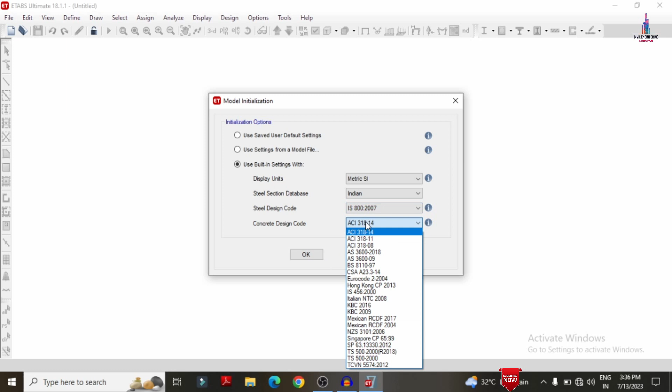Here I am selecting the Indian standard codal provisions, and steel will be IS 800 and concrete will be IS 456 2000. Click on OK. Then we have to enter the grid dimensions data and story dimensions data like this. Here the grid dimension in the x direction is 6 and this is also 6. Here I am selecting 3 here and 3 here.

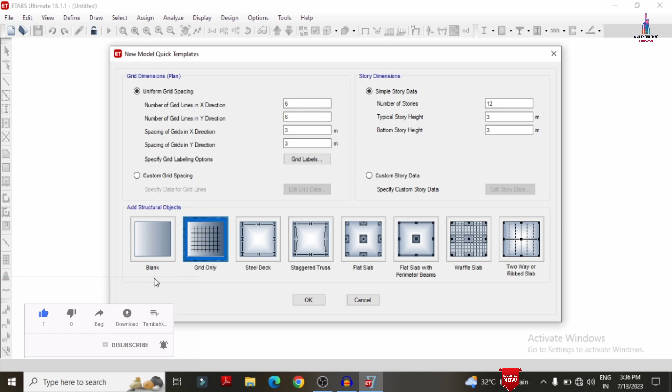Number of stories, here I am selecting 12 stories, and each story height will be 3 meters, as well as the typical story height also 3 meters. After entering all the data related to the grid dimensions and story dimensions, we need to select the grid only option. Why? Because we are creating a new model, so we need to select grid only instead of blank, steel deck, flat slab, etc. Click on OK.

The skeleton model will open here, consisting of the 12 story model. The left hand side window is called the plan view and the right hand side window is called the 3D view. If you want, you can change the right hand side window to plan view and the left hand side window to 3D view. Now you can see this is the skeleton model.

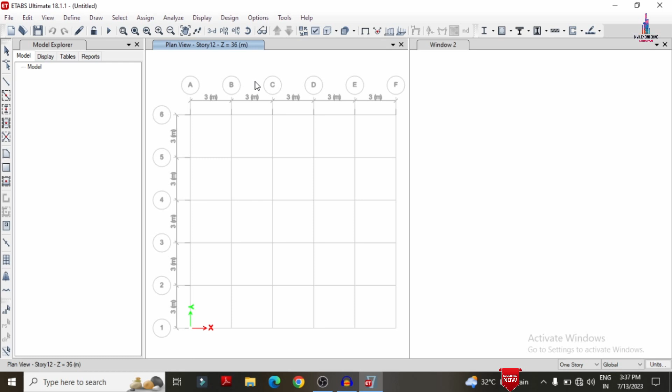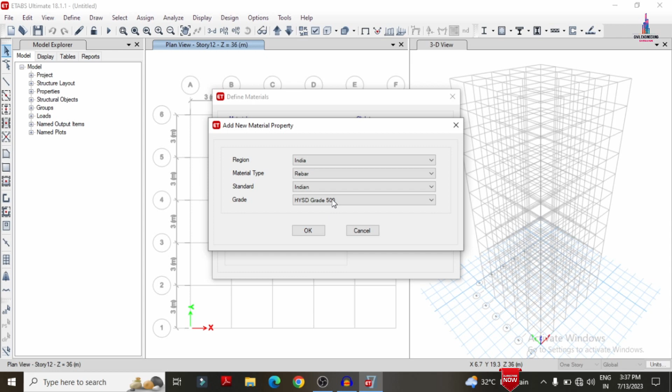After creating the skeleton model, we need to define the grade of the concrete as well as the steel. Click on Define, Material Properties. Here I am adding a new material. I am selecting Indian standard concrete of M30 grade, just assuming here, click on OK. Then, in the same process, we create the steel, not the steel section but the rebar, which is HYSD bars of 500. Just assuming according to my consideration. Click on OK. Again click on OK.

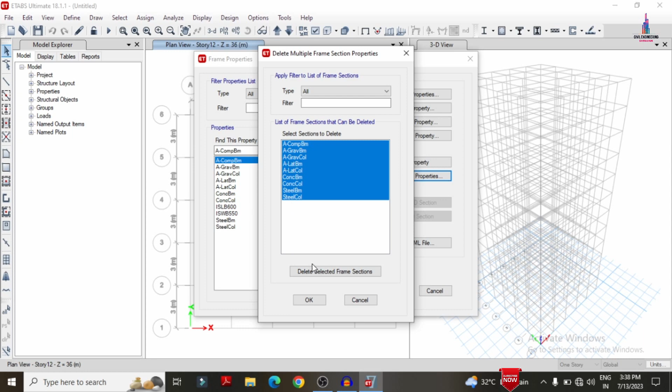After defining the grade of the concrete and steel, we need to define the frame section dimensions like beam, column, slab, and shear wall dimensions. For that, click on Define, select Section Properties, select Frame Sections. Initially we need to delete all previous frame sections. Here I am selecting delete multiple, click on delete frame section. Again selecting one more section, click on delete, click on OK.

Now we have to add sections according to our requirement. Here I am assuming all the dimensions, so you can assume your dimensions according to your consideration. Click on Add New Property. The data will open here like this. You need to select the shape of the cross section of the column or beam.

Initially I am selecting the column which is the rectangular section of 600 by 600, which is nothing but a square section that comes under the shape of rectangular here. So concrete rectangular - I am giving the property name as column 0.6 cross 0.6. Again we have to enter the material, selecting M30 grade concrete, and depth I am taking here as 600 and this is also 600. Click on the reinforcement option and select the column.

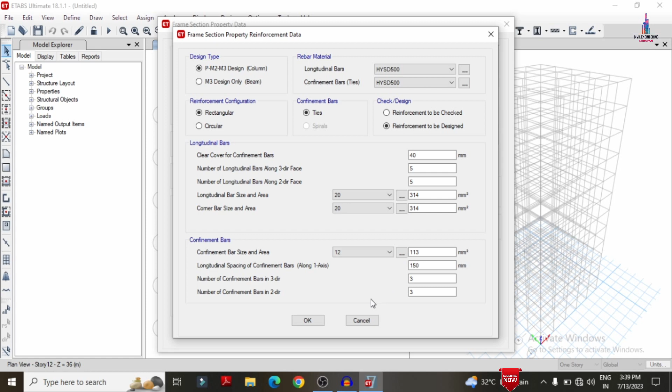I am selecting HYSD bars of 500 here. For the number of bars, I am entering 5, and I am taking the confinement bars as 12 mm. The rest of the data I am keeping constant. Click OK. Click OK.

In the same process we had to delete this property initially, then after that we had to add the beam section property. For that I am selecting add new property, select concrete. In the same process we had to create the beam.

I am selecting the beam which is 0.6 cross 0.45. Select M30 grade and select it as rectangular section. Depth I am taking as 450 mm - sorry, not 450, here 600 we have to consider. Again I am considering the width as 450 mm. Now we can see this is the dimensions of the beam.

Click on the reinforcement value, select it as beam section. Again we have to enter the HYSD bars. We have to take the top and bottom reinforcement as the same. Click OK, again click OK.

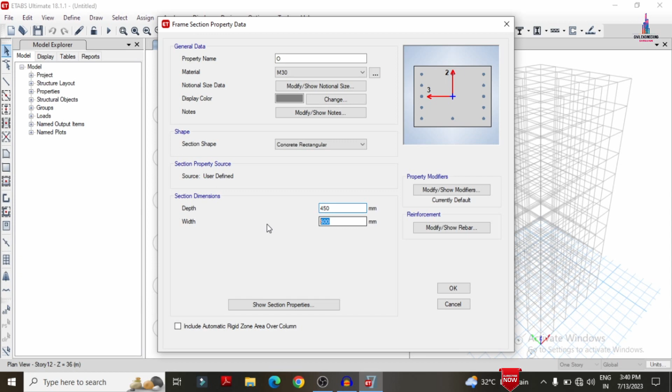Now we have to create one more section which comes under the concrete section, consisting of the outrigger section, which is M30 grade with 450 mm and 450 mm for the outrigger section, which comes under the beam property. I am selecting HYSD bars of 500, and taking 10% of the cover for the particular beam section. I am clicking on OK option.

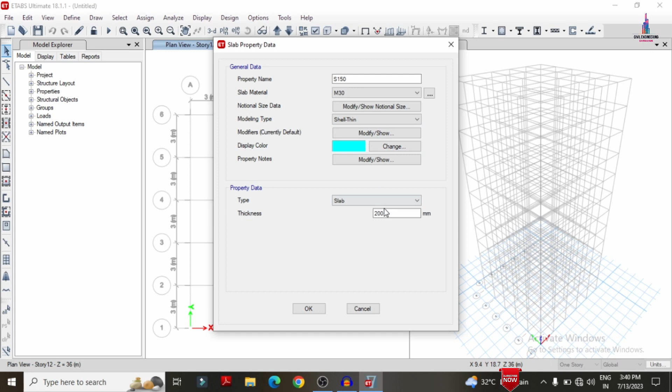After that we have to define the slab section. For that, go to define option, section property, slab section. Initially I am deleting this property, then modifying this property. I am selecting the slab of 150 mm thickness, select the material as M30 grade, giving it as 150 mm, clicking OK option. Then click OK.

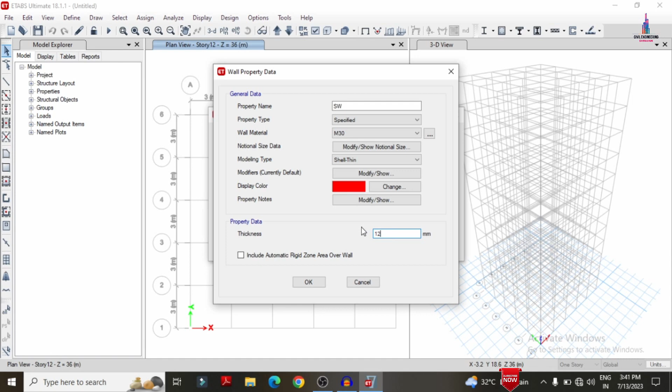After defining all this property, we need to define the shear wall also - the outrigger with the shear wall, just assuming here for the model. Go to define option, select the section property and select wall. Click on add new property, selecting shear wall section which consists of M30 grade concrete, taking it as 120 mm. Click OK option. Select the wall, click delete property, click OK, click OK.

So after defining all the properties like beam, column, slab, outrigger and shear wall section, we have to assign those properties for the building. For that I am selecting all models initially, and selecting the assignment of quick draw beams option here.

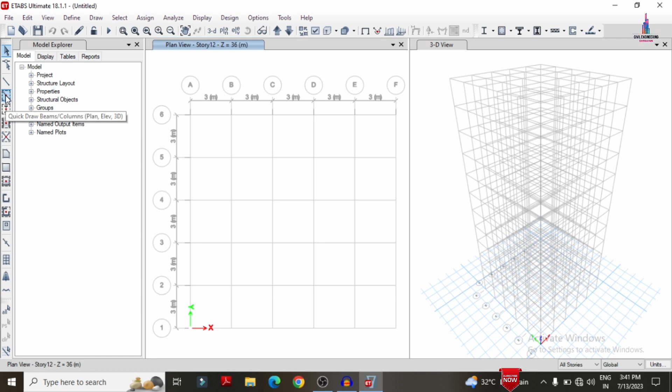Select the property name as beam instead of column on the left hand side. I am dragging to the plan model here so that it will assign all the beam section for all the floors. In the same process I am using the quick draw columns option, dragging here like this so that it will assign all the properties here.

Now we have to assign the slab section. I am selecting quick draw floors option here. Instead of property deck 1, I am selecting slab 150. I am drawing here like this so that it will assign all the properties for the building section.

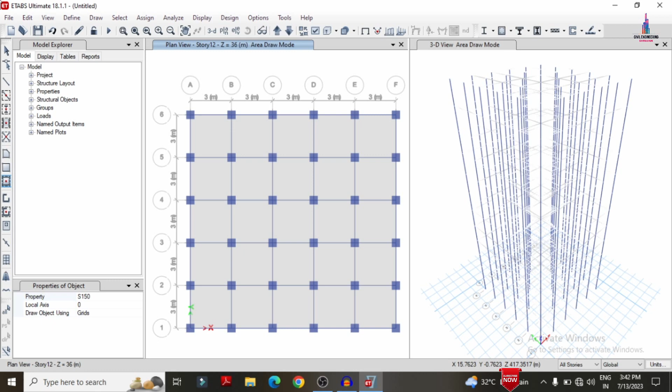Now after this we have to add the shear wall section. For that I am selecting the quick draw walls option, and selecting shear wall. I am assigning it at the center point for all stories here like this. Now you can see it was assigned with one wall.

Again I am assigning one more wall here like this. In the same process I will assign the remaining two walls for the building structure as core shear wall.

After that we have to assign the outriggers for the building. The building structure consists of 12 floors, so for this 12 floor structure I am assuming the outrigger will consist of inner side section inclined beams at the sections of 3, 4 and C, D here. For that I am selecting the elevation section which comes under the C section.

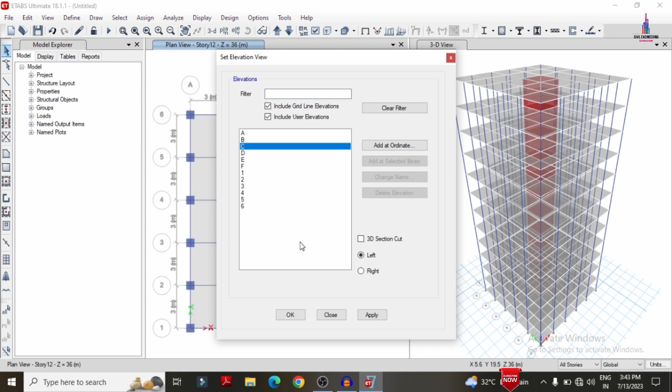Click on OK option, so again we have to draw the beams. I am selecting the add draw beam option. Now we have to change the property name from column to outrigger. I am selecting the fourth story here, and selecting the draw beam option. We have to select the property name as outrigger, selecting fourth story here.

Again in the same process we have to select one more point here like this. In the same process I am adding the outrigger in the left hand side section also, selecting the points here.

In the same process we have to assign one more section. For that I am selecting the draw beams option and selecting the points here like this.

Now in the same process we have to add all the outriggers for the respective 3, 4 and CD sections here according to my consideration.

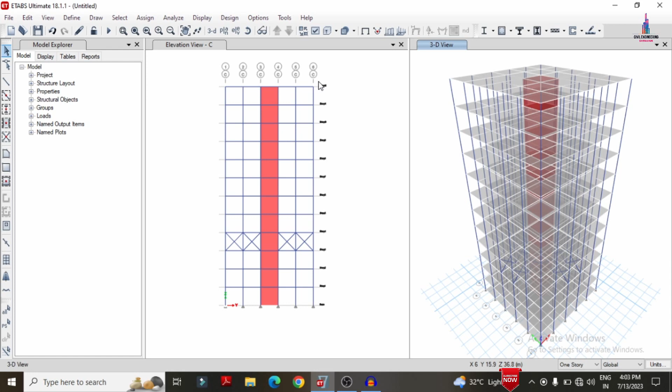Now we have to copy these outriggers to the remaining 8th story as well as the 12th story. For that initially we have to click on the plan view option, selecting the 4th story here, click apply, then click OK.

Now we have to select the outrigger. Go to select option, properties, frame section which comes under the outriggers. Select here so that it will select all the outriggers at the 4th story.

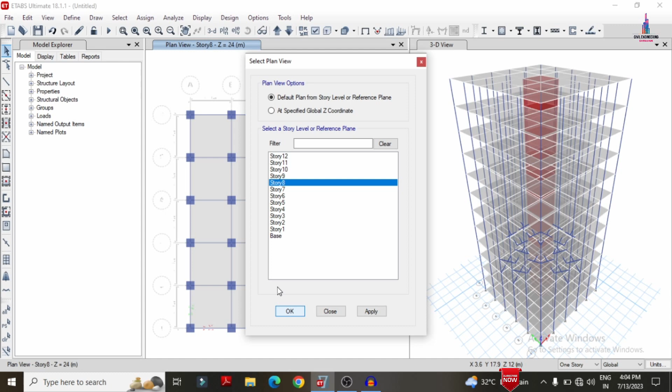In the same process we have to click on the plan view, selecting 8th story here, click on apply option so that it will select the 8th story. Now we have to copy these outriggers to the remaining stories, like 8th and 12th story. For that click on edit option, copy option, again click on edit option, paste option. Selecting OK option here so that it will copy your outrigger to the remaining 8th story.

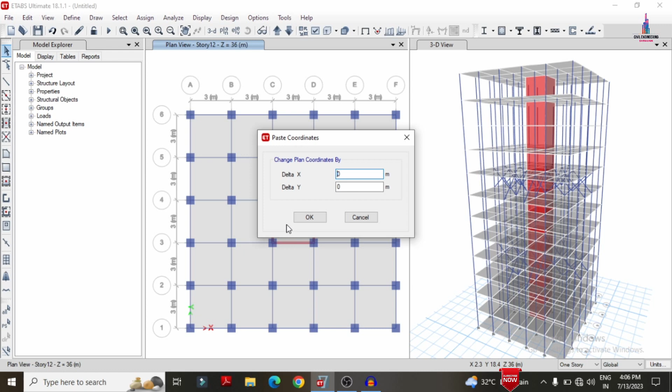Now you can see the outriggers are copied at the 8th story. In the same process I am selecting the 12th story here, click apply, click OK so that it will select the 12th story. Now in the same process we have to copy outriggers, selecting Control V option so that it will ask you to select the outrigger. Click OK so that it will copy your outriggers to the 12th story. Now we can see these are the outriggers.

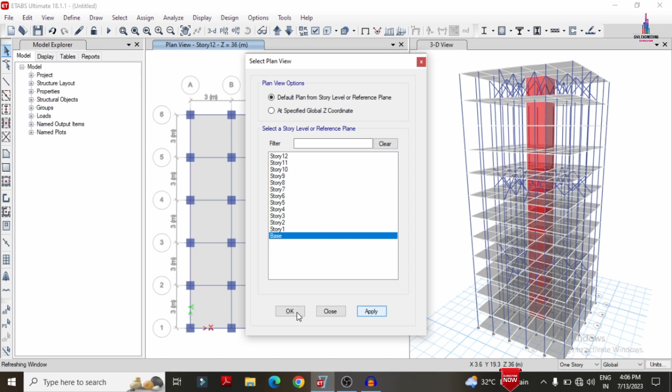After assigning all the outriggers, we need to delete the slabs at the ground story. Select the plan level, select the base, click apply, click OK so that it will select the plan view. Firstly we have to drag all this section by selection option, then click on delete option so that it will delete all the slab sections at the ground.

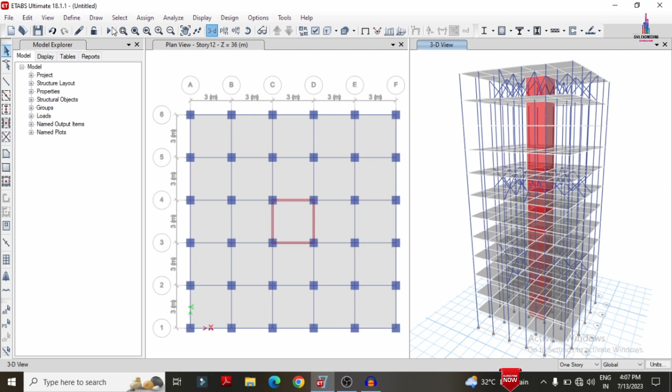After deleting is done, we have to give the load cases for the building structure. For that firstly click on the define option on the top, then select the load patterns option. It will consist of two loads here, related to dead load and live load. Initially we need to add this earthquake load.

Next I am selecting the seismic loading condition according to Indian Standard System 2016. In the same process we have to add the seismic load in the y direction condition. Then I am selecting wind load in the x direction, wind load which comes under the IS Codal provision of 2015, IS Codal provision of 875.

Click on add. In the same process we have to add the wind load in y direction condition. Click on add. Now we have to modify the load cases according to our consideration.

I am selecting the wind load and earthquake load in x direction. Click on modify option. Select the direction which comes under the x direction, and select the per code value according to my consideration. I am taking 0.36 which comes under zone 5 condition. Click OK.

In the same process I am selecting earthquake load in y direction. Here I am selecting the direction of y direction condition system. Click OK. Select the seismic load in x.

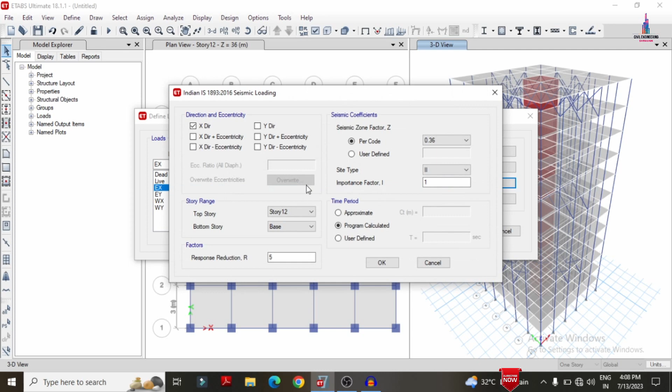We have to click and select the properties according to our consideration. I am selecting wind load in x direction. Click on modify lateral load.

I am selecting wind load of 44 meter per second which comes under terrain category 4. Here we have to change the wind direction angle to 0 and 180. Click OK, again click OK.

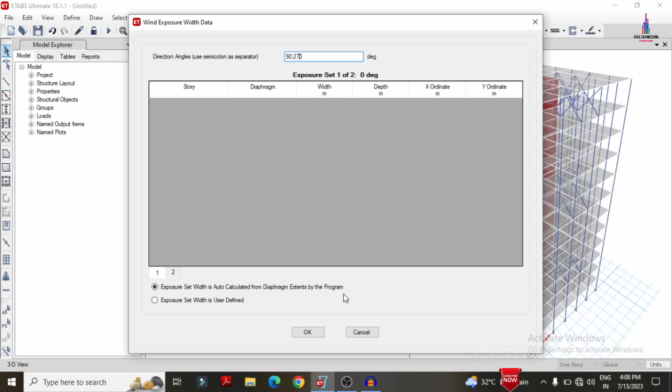In the same process I am selecting wind load y, which comes under the 44 value. Here I am modifying the option which comes under 90 degrees as well as 270 degrees. Click OK. Now we have to apply all the load cases.

For that firstly we have to assign the dead load condition. I am selecting all the beams, columns, as well as the slab. Assign option, joint loads, select the forces.

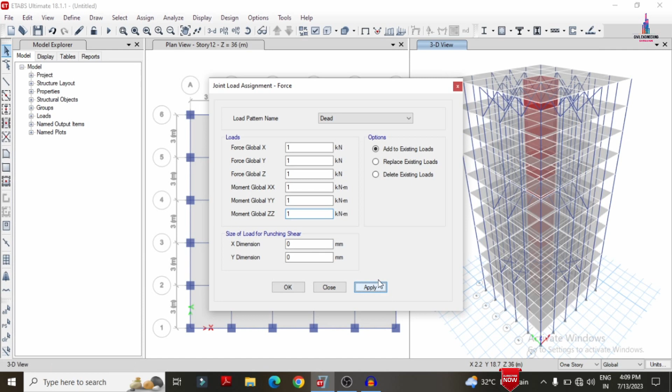Firstly we have to assign the self-weight condition system. I am selecting 1 1 1 1. Click on apply option so that it will apply the load condition system at the joints only. Now we can see it was applied at the joints.

Now we have to apply the load condition system for the frames and the slab section separately. Go to select option, select the property which comes under the frame sections of the beams. Click OK. Assign option, frame line load, distributed condition.

Here we need to add the load condition system for the external wall, internal wall, as well as the parapet wall loading condition system. In my previous videos I explained how to calculate the external wall load, internal wall load, and parapet wall load, which is a summation approximately equal to 24.3 kilonewton per meter intensity.

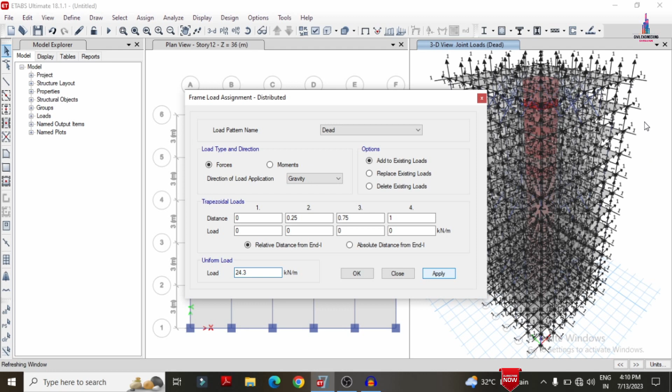I am selecting the uniform value of load as 24.3 kilonewton per meter. Click on apply so that it will apply the wall load condition system here.

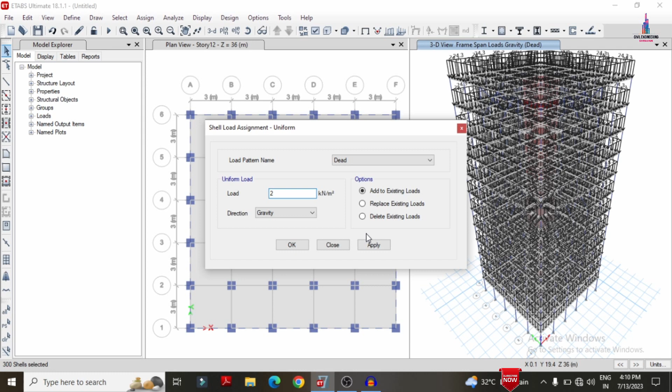In the same process we have to apply the dead load for the slab. Go to select option, property, slab section, and select here. Click OK. Again click on assign option, shell area load, uniform condition. I am selecting add to existing with intensity of 2 kilonewton per meter square. Click apply so that it applies the dead load condition system for the slab.

In the same process we have to apply the live load condition system for the slab. Go to assign, shell area load, uniform. I am selecting the intensity of 3, changing dead load to live load condition, add to existing. Click apply so that it applies the load condition system.

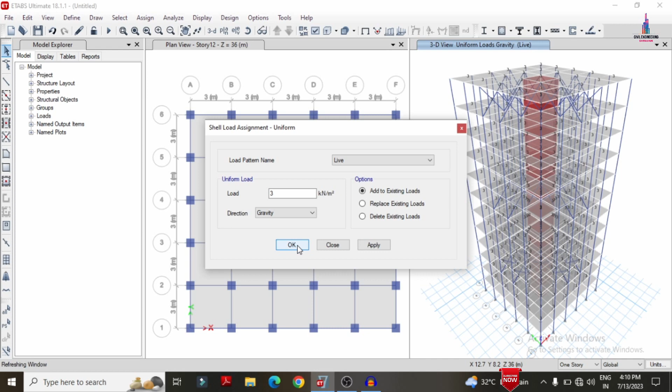Click OK. After this we need to apply the support condition systems. I am selecting the selection option, select by story level, selecting stories, base, select option, close option. Go to assign, joint, restraints, select fixed supports, click apply, click OK.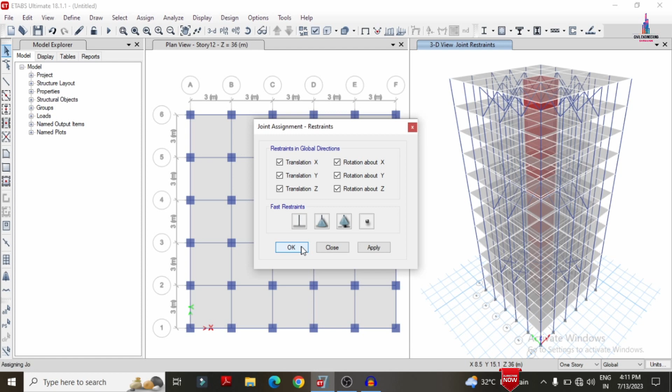After that we need to add the load combination system. Go to click on define option, load combinations. I am selecting default design combination, concrete frame design. Click OK, click OK.

Now we have to analyze the structure. Go to analyze option, check models. Initially we need to check for the errors, click OK.

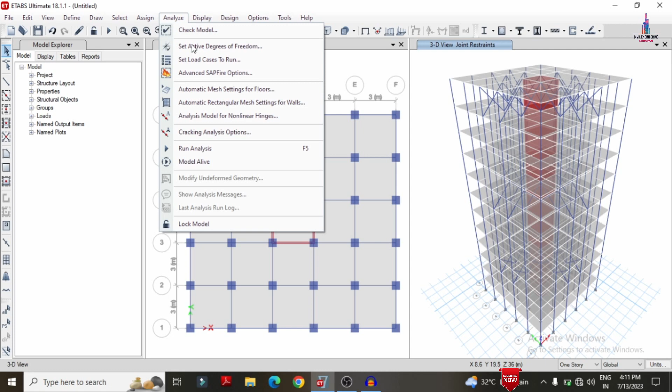Then after that I will show you the deflection diagram, shear diagram, bending diagram, and then we will do the designing process for the outrigger building by using ETABS software.

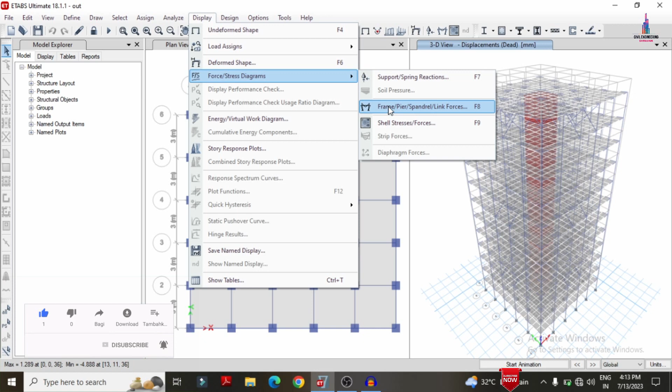Now you can see it was done with the analysis process. This is the deflection diagram. So in order to see the shear force diagram, click on display option, show forces, select here as frame/spandrel force, select shear option. Click on apply so that it will display the shear force diagram for the particular structure.

In the same process you can click on the bending moment diagram so that it will display the bending moment diagram for the particular structure under consideration of the load cases. Okay, so now we have to design the structure. Now we have to design this outrigger building by using ETABS software. So for that initially we need to unlock the model.

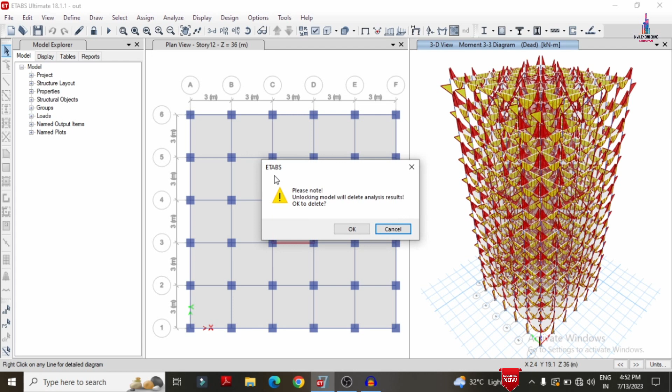Firstly I will add the strips for the slab. Go to edit option here on the top. Click on the add/edit strips option, click on edit strips option. So here I am selecting story number 12, grid direction will be X and strip layer is A. Click on apply so that it will add the strips in X direction.

In the same process I am adding the strip in Y direction. I am selecting Y with the strip layer B. Click on apply so that it will apply the strip system for the 12th story here like this. After that we have to add one more strip. I am adding 2 strips only for this building structure.

Why? Because if I add strips for 12 different stories, it will take some time for the analysis process. To reduce the analysis time, I am taking the top story as well as the bottom story for the building structure. So here I am selecting story number 1, X direction and A layer. Click on apply so that it will apply the strip system for the A layer.

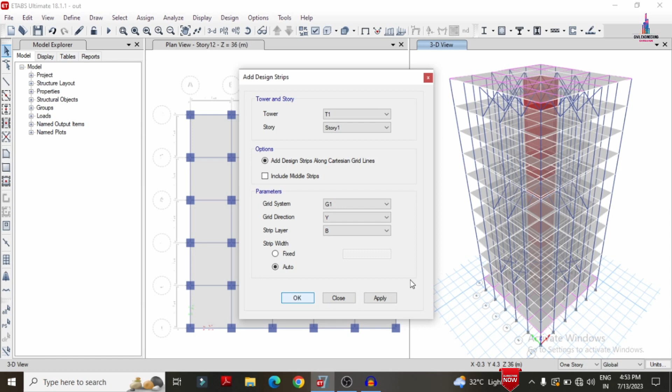In the same process I am selecting the grid direction Y with B. Click on apply so that it will apply the strip system at the base here like this. After that we have to analyze the structure again before designing the structure. So I am selecting the analysis option for the building structure. Now it will do the analysis process. Now you can see it was done with the complete analysis process.

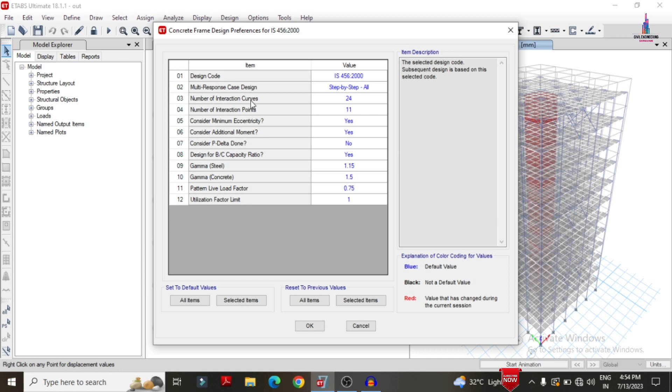So now we have to design the structure. Click on design option, concrete frame design, click on view/revise preferences. Initially we need to check whether it has the correct data or not. Click on OK. Then again click on the design option, select concrete frame design, click on the start design/check option so that it will design the beam sections and column sections.

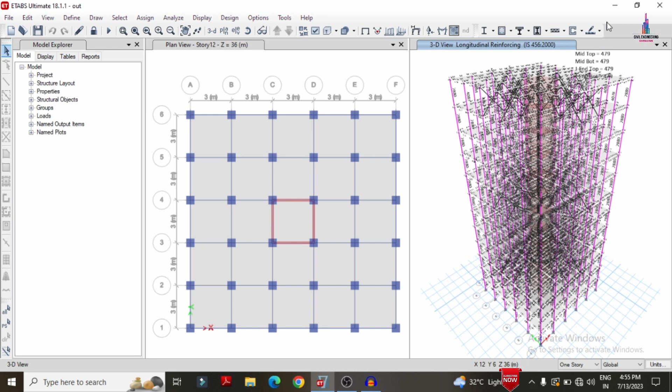Now we can see it was done with the complete designing process of the beams. Now we have to design the slab. Click on design of the slab. Click on start design/check option. Firstly we have to select the stories. I am selecting the first story as well as the 12th story. Click on OK so that it will start designing the first story slab as well as the 12th story slab for the outrigger building using ETABS software.

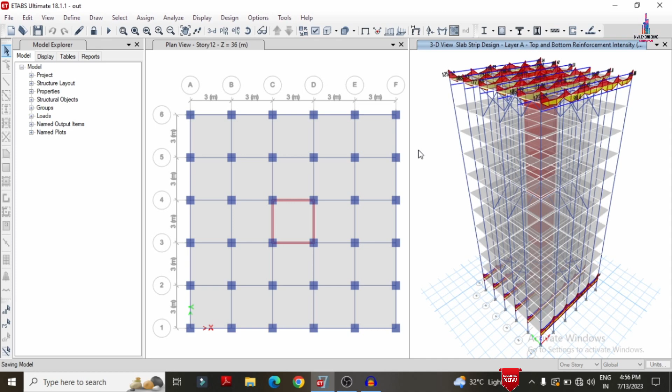We can see here the strip design values for the first story as well as the 12th story slab. Now we have to save this model. Press Ctrl S so that your model will be saved. Now we have to import this model to CSI Detailing software. This is the extension for the ETABS software. Here I am selecting CSI Detailing 18 version.

Select the file option here. I am selecting the new detailing option. Initially we need to select the model. I am selecting the outrigger building. Initially the data will be exported from ETABS software to CSI Detailing software.

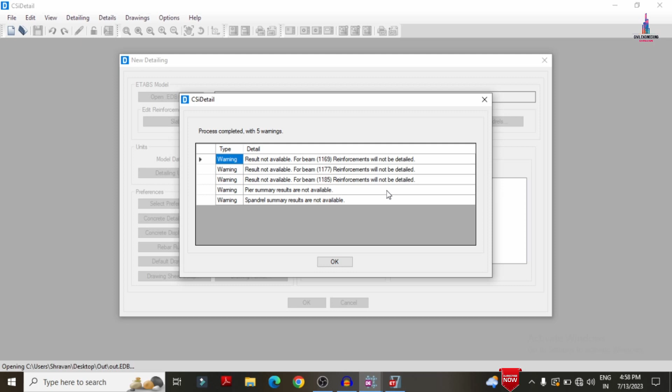Now we can see here all the data is extracted. So initially we need to select some of the options after the extraction process is completed. Firstly we have to select the detailing units option. In this we need to change the force to kilonewton and select the rebar to ton option here. Click on OK. Select the preferences option. Select the user preferences according to Indian standard system. Click on OK. Select the concrete detailing preferences.

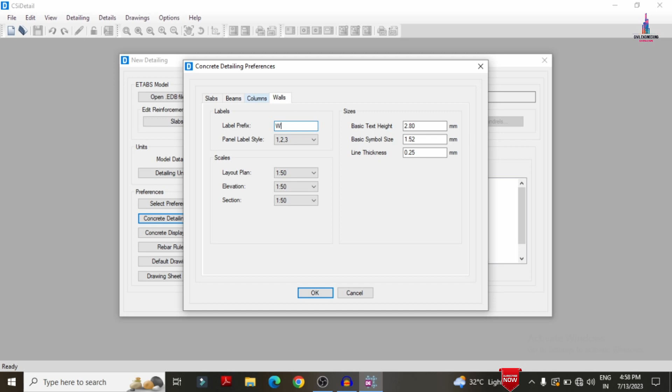You can give the beam name to B option here. Again in the same process, column name to C option here and wall name to W option here. Let us consider here. Click on OK. In the same process I am selecting concrete display preferences. You can select according to your consideration. I am simply selecting OK.

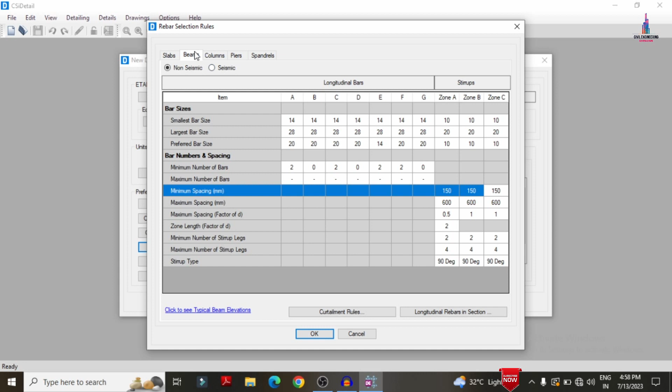Rebar rules option here. So you can select the beam rebar rules option, column rebar rules option according to your consideration. I am simply selecting here as 150. 150 is the minimum value for the rebar we have to consider. Again I am selecting column. I am not changing anything here, just the minimum value will be 150 here. And again I'm selecting spandrel. You can change your consideration according to the specifications.

Click on OK. Select the default drawings option. You can select any one of the options from this. Drawing sheet setup you can select according to your consideration. Directly click on the OK option so that it will start designing your model, which consists of beam sections, column sections, slab section for the building structure. Then after that I will show you the complete results, which is reinforcement results for the outrigger building.

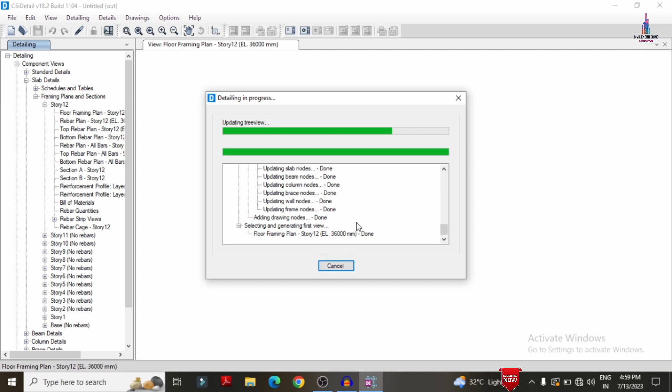Now you can see this is the slab designing results. This is the floor framing plan, this is the rebar plan for the particular structure, this is the top rebar plan, this is the bottom rebar plan, this is all rebar plan for the particular structure. This is the top rebar plan, bottom rebar plan, this is the section view at section A, section view at B, and this is the reinforcement layer for the particular structure, reinforcement layer B.

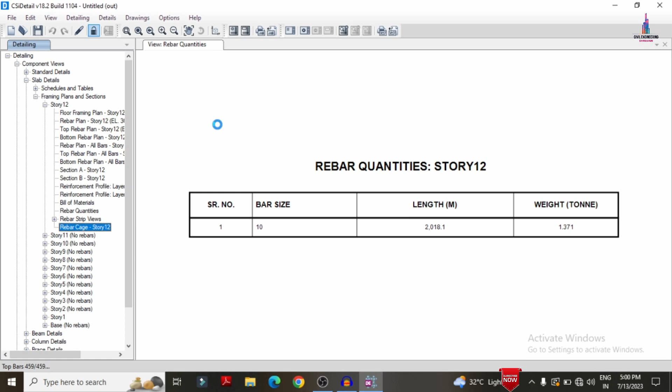This is the bill of material, this is the rebar quantity values, and you can click on the rebar cage view option so that it will load the rebar cage view for the particular slab section with the reinforcement in both X direction as well as Y direction for the outrigger building. So now we can see this is the rebar diagram for the particular slab section. In the same process I will show you the beam detailing.

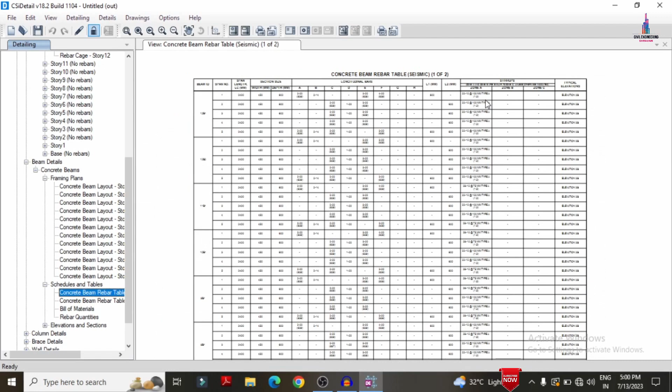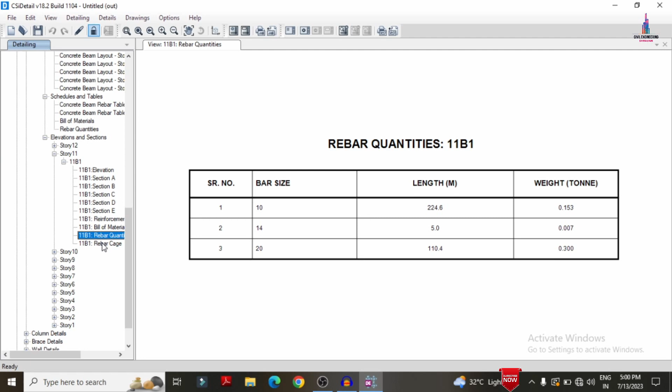Select the concrete beam framing plan, click on the framing plan option so that it will load the framing plan here like this. Next I'm selecting schedules and tables, which consist of schedules and drawings for each and every diagram. In the same process you can click on the quantities and the elevation. You can select any one of the floors. I'm selecting one section here. This is section A, section B, section C for the particular floor. In the same process reinforcement details, bill of materials, and select the rebar cage view so that it will load the beam reinforcement diagram for the particular structure.

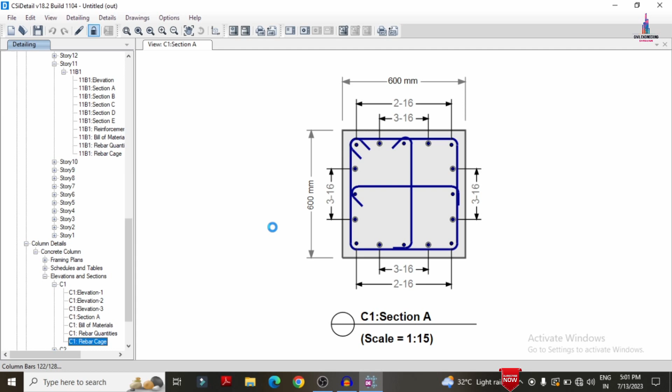In the same process I'm selecting column, I'm selecting elevation section C1 like this. Now you can see this is a rebar cage view for the particular column. In the same process you can load the other details of beam sections, column sections, and slab section for your particular floor. Whether your floor is second floor or third floor depends upon your floor consideration, you can select. So now we can see this is the reinforcement value diagram for the column.

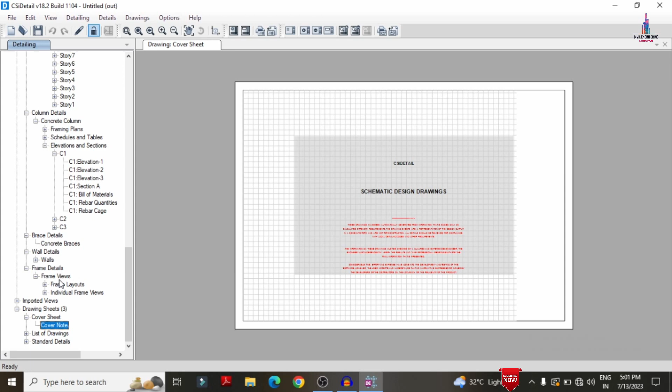In the same process you can select the braced frames also if you want. You can select the wall frames also, frame detailing also, depending upon your consideration. You can select the detailing view option, cover sheet, cover note option, and list of drawings option, and standard detailing of the particular section here. So this is the complete process of designing an outrigger building by using ETABS software.